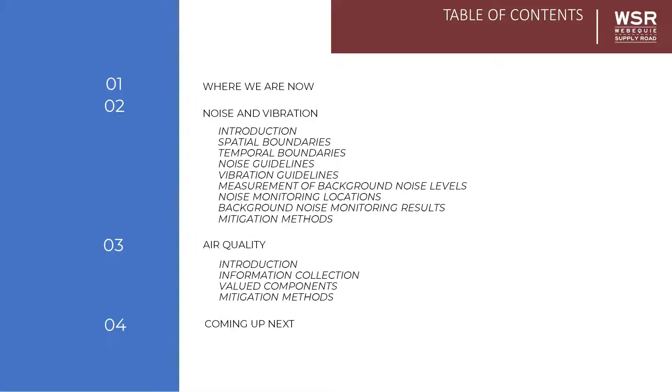And then when it comes to air quality, we're going to provide a bit of an introduction to that, talk about information collection, valued components, and then finish off with mitigation methods. And then we will wrap things up by talking about what's coming up next.

So where are we now? If our team can turn to slide number 3, please. So last October 8th, we reached a project milestone for the Webequie Supply Road project. Our EA terms of reference, our environmental assessment terms of reference, was approved by MECP. And this meant that we could then move officially into the environmental assessment phase of the project. Because our work plan had been officially approved, now we can focus on completing the environmental assessment report since we now know exactly what's expected of us.

So let's move and talk a bit about noise and vibration in terms of an introduction. So what is sound? Well, sound is changing pressure in a fluid medium such as air or water as well. And noise, the simplest definition of noise is it's defined as unwanted sound. And in terms of vibration, vibration is the repetitive motion of an object, surface, or fluid. And it may travel through air, the ground, or water.

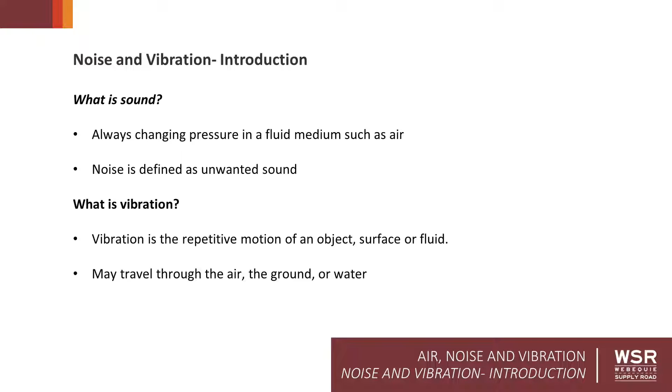So maybe one of the easiest ways to talk about sound and sound levels is to give examples. Sound is measured in units called dBA. And so I just thought I'd put this table up here. This is slide number 5 in our PowerPoint. Just to give people an idea of what dBA level very faint is: human breathing has a sound level of 5 dBA. Then you move into what you call faint sounds. This would be like a whisper, and that would be 25 dBA.

Then you move up to moderate sounds. So if you look at maybe a suburban area, or let's say a rural area, something closer to what the environment might be in Webequie. Typical rural areas, noise levels are around 45 dBA. Then if we move into the category called loud, let's take normal human speech from a meter away. That's 65 dBA.

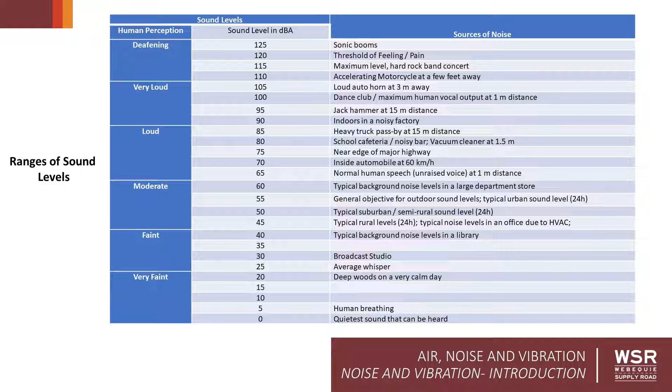And then we move to very loud. Very loud would be a jackhammer, 15 meters or 50 feet away. And then when you get into deafening, that's stuff that's more like a rock concert. A rock concert's 115 dBA. And then the level at which you feel pain in your ears because of something being so loud would be around 120 dBA. So hopefully that gives you an idea of the different sound levels.

So if our team can move to slide number 6, I will talk a bit about spatial boundaries. So generally speaking, for most studies, the spatial boundaries are based on the project footprint, the regional study area, the RSA, or local study area, LSA. Noise and vibration is a bit different though. These are highly localized effects and they don't affect things on a regionally sized level. So the RSA and the LSA, the regional study area and the local study area, are actually the same.

So specifically for noise, the RSA or LSA used in our assessment is defined as within 1.5 kilometers of the boundary of the settlement part of the community of Webequie First Nation and the airport, and then within 600 meters of the proposed roadway center line. And at these distances, the noise from the roadway and airport operations and roadway construction activities is expected to basically dissipate to background conditions in a fairly short distance.

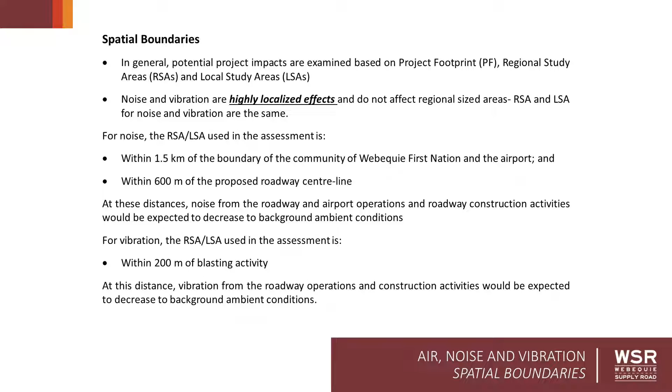When it comes to vibration, the RSA or LSA used in the assessment is within 200 meters of the blasting activity. So vibration is typically associated with blasting activities. In this case, the blasting would be done for the purposes of taking rock and creating construction material, whether it's aggregate sized rock or medium sized rock, such as riprap that might be used to protect culvert outlets. And so vibration is focused more really on one set of activities related to this project, and that's blasting.

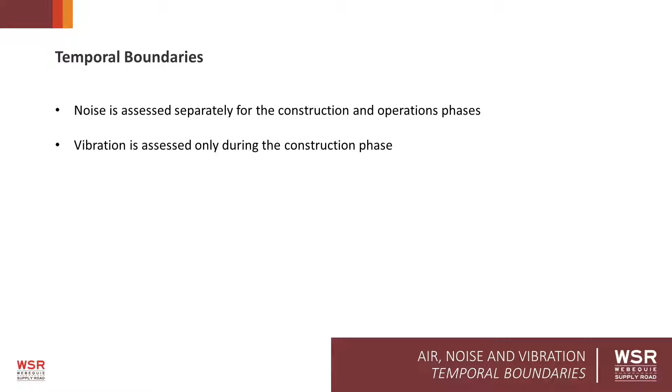If our team can shift to slide number 7, please. We will talk about temporal boundaries. And when I say temporal, I mean time. So noise is typically assessed separately for both the construction and operations phases because there's different levels of noise, there's different types, sources of noise as well. And then vibration is assessed only really during construction because most of the blasting that would take place would occur during construction. It might happen later on, very occasionally, if there's a need for more rock for maintenance of the road as well.

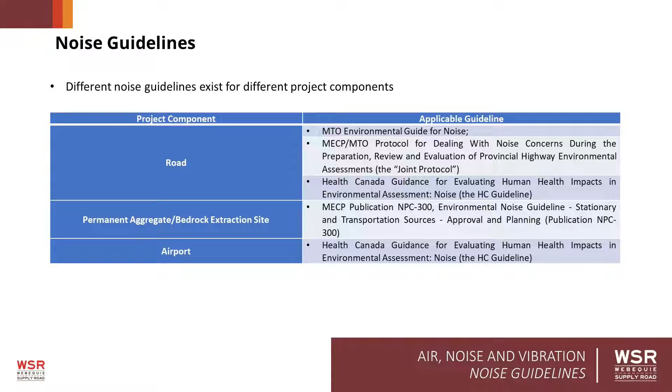And then other project components that have guidelines associated with them would be the permanent aggregate or bedrock extraction sites. And then there's a guideline associated with that from MECP. And then the airport, which is not technically part of a project component, but it sits near our project area. It has its own applicable guideline as well.

So how do these noise guidelines actually work? Well, just to give you an example, the MTO and MECP roadway noise guidelines are based on a change between background noise levels when there is no project, so current conditions, versus if the project's actually built. So they project what the noise levels might be after the project is built. They compare them with when there is no project built, current conditions, and when there is a change in background sound levels between the no build and future build greater than 5 dBA, then an investigation into noise mitigation is actually required. So that gives you an idea of how the noise guidelines actually work.

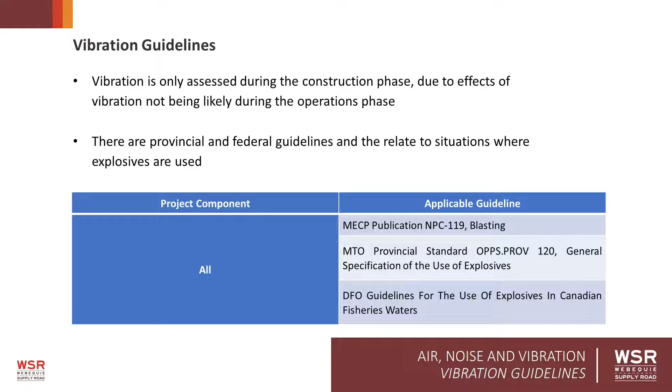When it comes to vibration, vibration is only assessed during the construction phase. And the reason why is because the effects of vibration are not likely during the operations phase. And we talked a little bit about that earlier. There are provincial and federal guidelines, and they relate to situations where explosives are used, as I mentioned before, those blasting activities. There's an MECP guideline for blasting. There's an MTO provincial standard for the use of explosives for the purposes of blasting. There are DFO guidelines for the use of explosives in Canadian fisheries waters as well. So there are three sets of guidelines that are applicable in the case of vibration.

So let's talk a little bit now about the measurement of background noise levels. There was work done in the community where these noise recording devices were installed between October 29th and November 1st of last year. And there were three locations. I'll show you the map in a second. There was M1, which was a location within the community at the western end of the Webequie Supply Road route. There was location M2, which is 10.57 kilometers southeast of the western end of the planned WSR, and that's being used as representative of remote conditions far away from the community.

And then finally, there was the M3 monitoring location, which was 4.41 kilometers along the proposed route, away from the community, but along the proposed route. And this was used as representative of conditions along the route.

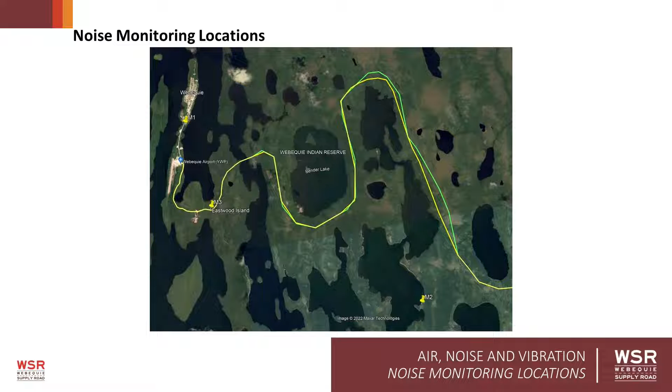If our team can now move to slide number 13, please. So let's talk a bit about mitigation, noise and vibration mitigation, and some of the methods that could be used. So where applicable provincial and federal noise criteria are exceeded, mitigation measures can be used. Now, mitigation is a word that we use a lot in these presentations, and when we talk about environmental assessments or impact assessments. And mitigation just means eliminating or mainly limiting impacts. Sometimes eliminating, but generally limiting impacts, reducing impacts.

And so the kinds of methods that could be used are relocation of equipment, selecting equipment that might be quieter, upgrading equipment with maybe better quality mufflers that muffle the sound better and reduce the sound levels. The use of physical types of structures such as berms, small hills, noise walls, or other acoustical screens you probably have seen on major highways, the noise barriers that separate residential communities typically from major highways.

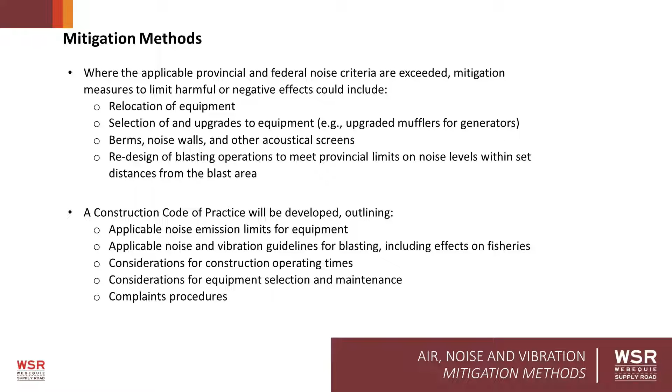You could redesign blasting operations so that they wouldn't exceed the noise guidelines as well. Different equipment could be used. There's lots of different approaches when it comes to blasting. Another mitigation method could be the development of a construction code of practice where applicable noise emission limits would be set for equipment, noise and vibration guidelines for blasting, operating times of construction vehicles and heavy equipment, considerations of selecting certain kinds of equipment for construction and for ongoing maintenance in the longer term, and then methods for handling complaints with regard to noise as well. So there are a number of mitigation methods available.

Let's now move to talk a bit about air quality. And just by means of an introduction, the air quality studies typically involve modeling, and you're modeling for potential temporary or permanent effects on key sensitive locations. And when I say sensitive locations, we also call them receptors. So these are locations where the project could have an effect on air quality, water, or vegetation.

These sensitive locations, to put it in a community perspective, could include hunt cabins, spiritual sites, community centers, hospitals. They could include habitat for species at risk, such as caribou, as well. Another example that's mentioned here is where there are medicinal plants that are used by the community as medicine. Those would be sensitive locations because those plants are harvested and used by community members as medicine, so dust fall could impact them as well. So this is what we mean by sensitive locations or sensitive receptors.

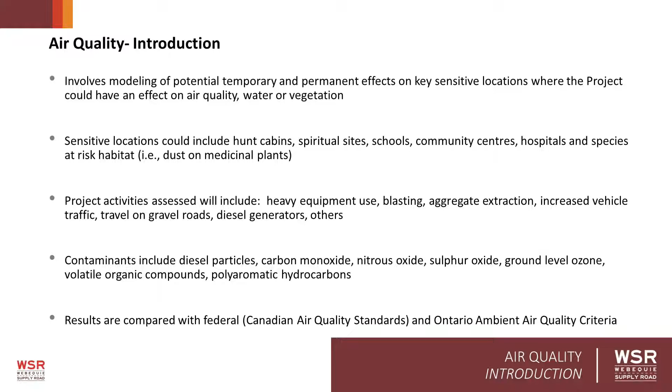The types of project activities that are associated with impacts on air quality include heavy equipment use, blasting, aggregate extraction, vehicle traffic, gravel roads creating dust, use of diesel generators, and many others. The kinds of contaminants that are looked at include diesel particles, carbon monoxide, nitrous oxide, sulfur oxide, ground level ozone, volatile organic compounds, and finally polyaromatic hydrocarbons. So there's a lot of different contaminants that are looked at in terms of the air quality monitoring. And then the results of the modeling are compared with both the federal Canadian air quality standards and the Ontario ambient air quality criteria.

If we can move to slide number 15, please. We'll talk a little bit about information collection for air quality. The types of information collected would be, and again, this overlaps a bit into climate change and greenhouse gases as well, but we might talk to community members about changes that they've seen and trends in climate and any impacts that those have had on lands and resources.

We would talk to construction and operations or maintenance experts on the kinds of activities undertaken, the expected volume of vehicles using a road, the types of construction equipment used, the typical emissions from that equipment, and the duration that equipment is used for during, for example, construction in the project. And then talking about maintenance as well, the extent and frequency of maintenance operations on the new roadway, use of electric power for buildings sheltering maintenance vehicles and equipment.

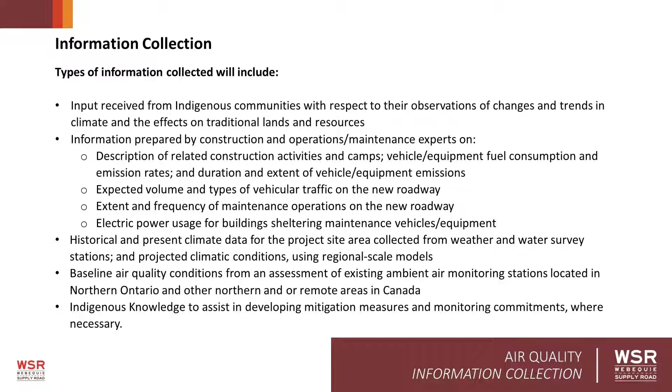We will look at climate data as well too, because again, we're looking at climate change, we're looking at greenhouse gases. We would look at baseline air quality conditions, so we have something to compare to. And then indigenous knowledge just feeds all aspects of this as well too. So there's a lot of different types of information that are collected as part of this work.

And now let's talk a little bit about valued components associated with air quality studies. So when we talk about valued components, we're talking about things that are being studied, criteria, things that are being studied as part of the air quality study, for example. And then indicators: indicators are ways of measuring things. So indicators for air quality might be qualitative and quantitative assessment of changes in ambient air quality. They could be vehicle exhaust emissions, they could be dust emissions, and then also greenhouse gas emissions.

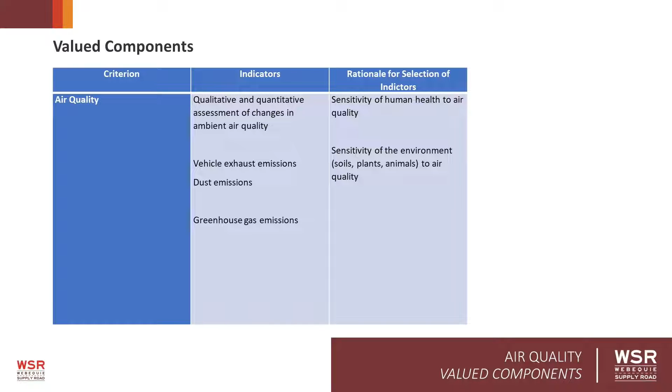And the reason for selecting these kinds of indicators is, first of all, sensitivity of human health to those air quality changes, and then sensitivity of the environment, like we talked a little bit about before, including soils or plants or animals, to changes in air quality. So those are the valued components associated with the air quality studies.

And then finally, let's wrap things up by talking a bit about mitigation methods, and these are broad, because they include looking at not only air quality but greenhouse gases, looking at climate change as well too. So some of those methods might include using low carbon or renewable fuel in the heavy equipment that's used for construction purposes, minimizing the idling, the engine running, when the equipment isn't actually doing any real work, to reduce fuel usage and emissions, obviously.

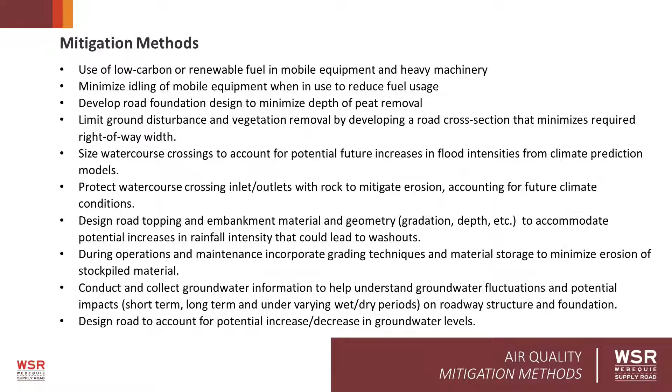We also have conducting and collecting groundwater information, to understand groundwater levels and changes in groundwater levels, to make sure that the road is not causing any significant impacts on groundwater levels, and designing the road to account for any potential increase or decrease in groundwater levels from climate change, basically. So there are a lot of different mitigation methods associated with air quality and greenhouse gases and climate change as well.